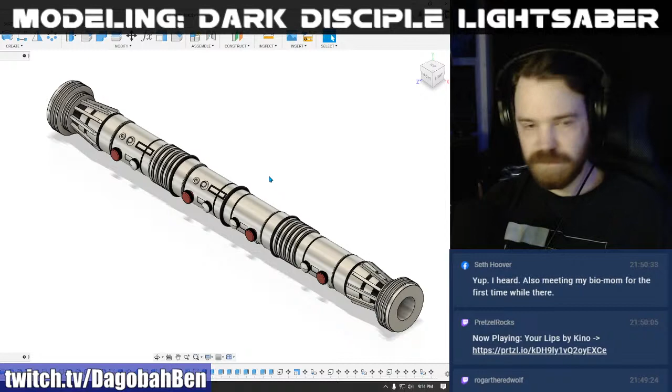All right, so if I get rid of all that stuff and the adapter, because this is the part that we'd be attaching the Dark Disciple's hilt to. And if we want it to look like it's half and half, then...

244. That's kind of short, isn't it? It's a little short. Did it have the pommel section, or did it stop at the black grip where they were joined together? Oh okay, so it stopped at this extra pommel area. Okay, that makes sense. So that's going to be our pommel area. So 244 minus the pommel, without the pommel. With the pommel it'll be longer, which seems about right.

Where is my image? What the heck, man? That didn't show up at all. Is it just too small? What's going on here? What the heck? Okay, that's weird. Canvas is not showing up.

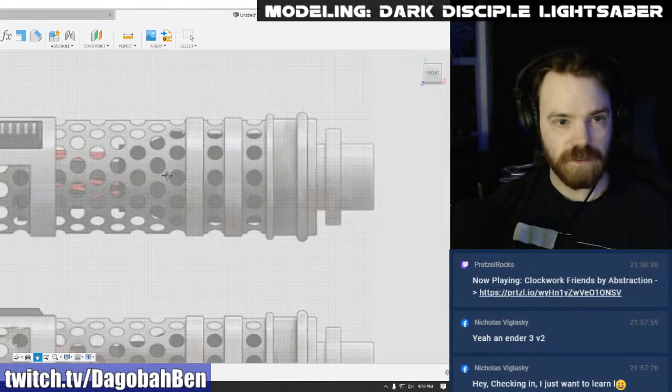Let's go create a sketch, and I need to... actually, you know what, make some reference lines first. That's what we need to do. Okay, so the radius of this inner tube is going to be around 16 to 16 and a half. Let's do 16 and a half just to be safe. Okay, so now I'm going to make a sketch this way, and we're going to do 33.

I'm thinking about this, and I think I need to go larger in diameter, because the rest of the sabers usually average around 40 millimeters on the smallest circumference. So I feel like I need to start at 40 with those, so that all the connectors fit the way that they do on the other sabers.

Wanted to use this to aid with machining. Figured it was time to jump on board. I use Mastercam for CNCs. Fusion 360 does do CNC stuff as well, but the free version is a little bit limited in what it can do for CNC.

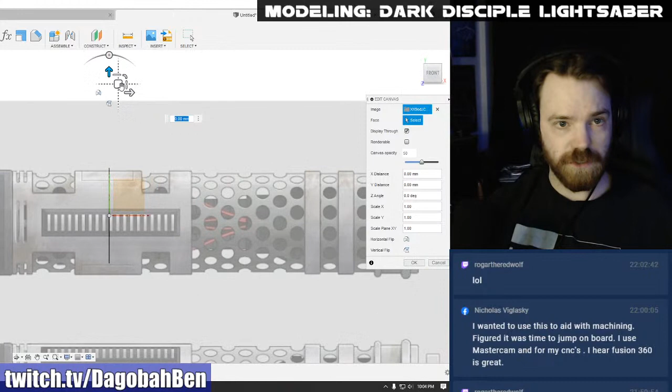So, all right, we need our origin there so I can get this to line up right about the middle. All right, so now I should be able to go 40 with this.

Make a quick line, offset it, make both those lines construction lines, and then use my trim tool to trim right between them and break the circle. Once I have a broken circle, I can go to my sheet metal tools, and I'm going to create a flange out of this, and try to figure out about how long I need it.

Let's see, go 2 sides so we can fill that out. And we need to be on the inside. So it's 40 millimeters around the outside like that. Hit OK.

And then we come in here and we extrude a tiny little section so that I can grab that little flat piece and unroll it.

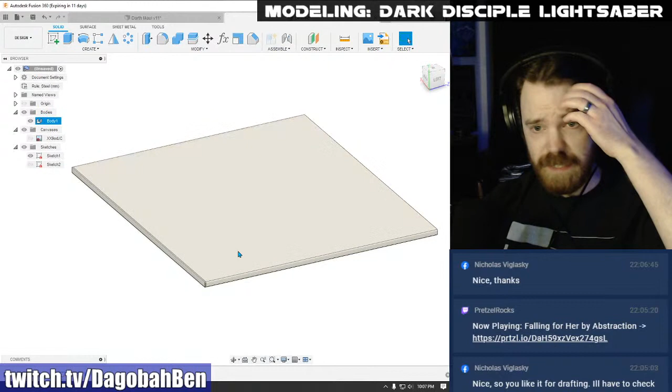So to me, it was a much smaller learning curve than something like Blender, where Blender is more like modeling with clay, and if you want to get into different tools like more parametric modeling, man, I couldn't get the hang of it. I really couldn't. But as soon as I opened Fusion and got used to the sketching tools, oh man, it was super easy. All right, so I want to figure out the dimensions of this guy.

So we're at 130 by about 115.9. Okay, so then we open up Illustrator.

Okay, so it was, oh, I need to redo this document in millimeters. New document, millimeters. There we go. Okay, and it was, what was it? 115.9 by 130.

Okay, artboard size doesn't really matter for this, because all we really need to do is just make a bunch of circles that I can then repeat a whole bunch of times. Oh, wait, what am I thinking? I don't need to do this in Illustrator. I can do a pattern of circles in Fusion. That's so easy. What was I thinking?

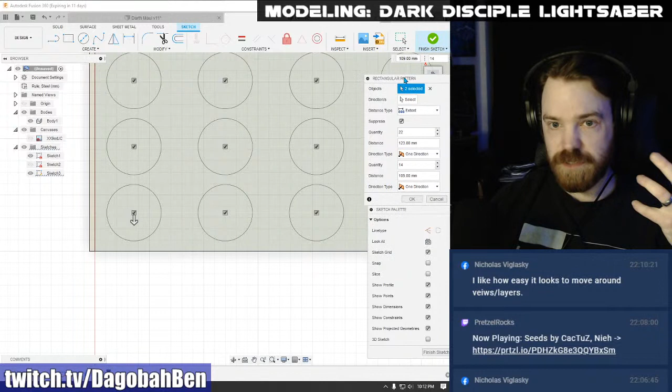Oh yeah, it is, it's very easy to navigate. Being able to change your view, turn things on and off. It makes doing these processes really much faster than some other programs out there for sure.

Okay, so I think, so if I shifted this over to like there, you know, where they meet up in the middle. Let's go 15. All right, cool.

Then if I want to see if this works, I want to see if I can grab just those, move them. Oop, nope, it doesn't want to do that. The reason it doesn't want to do that is because it remembers my pattern. So if I click on my pattern constraint and delete my pattern constraint, that means I can't edit the pattern. But it should let me move things.

That looks pretty right on. Okay, so if I just grab every other row and do that, then we should end up with what we want.

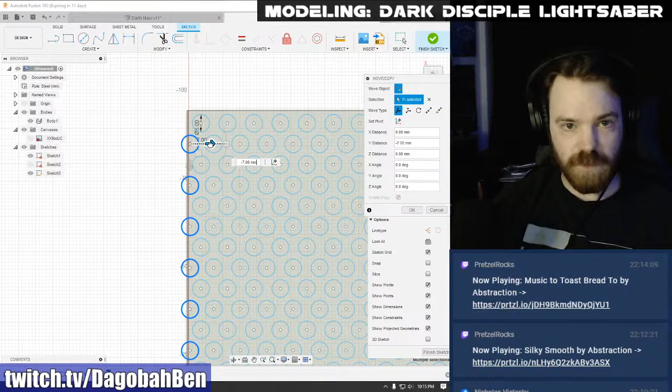That looks about right, doesn't have to be exact. We're just going for, you know, for that piece right there anyway. All right, so that finishes the sketch.

Then I should be able to, if I go in and I select everything, or actually, you know what I should do? Not do that. I should, come on, there we go.

Hit extrude first, and then select almost everything. And then I'm just going to deselect the space between them. That's okay, Edward, you can be confused, and that is valid.

There we go. All right, what is going on? Why aren't you? What do you mean you only have one profile selected? Oh, come on, don't make me pick all these individually. Okay, well, I mean, that got most of them.

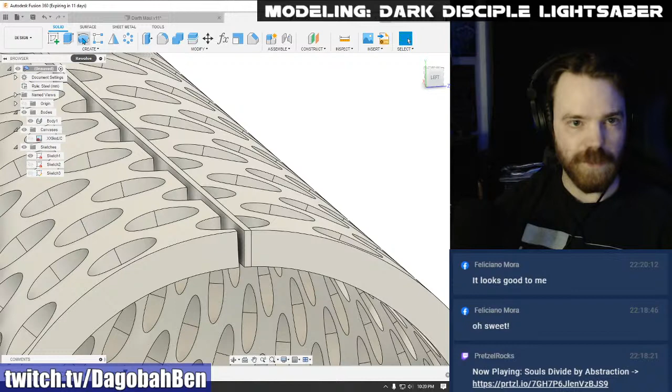All right, so we're going to turn off the canvas, and we need to close this up. So to do that, all I need to do is go back to solid. I'm going to revolve this profile around our central axis, and it's going to automatically pull it 360 degrees and think that I'm trying to cut everything, but I'm going to put 2 degrees.

Because I want it to just overlap this stuff, not very far. One degree doesn't quite do it, so maybe like 1.5. Okay, so now it's cutting into that face, and all I have to do is hit join and hit OK.

And now those two faces are joined together. It's still a sheet metal body, so to break that, usually what I do is I take it into surface mode, and then I delete surfaces and then repair the surfaces, and then stitch it back together as a body.

Now this thickness, 2.5 millimeter thickness, that's a pretty decent thickness for this particular mesh tube thing. We could cut this thinner if we wanted to, but in surface mode I can just delete that face and that face and that one too.

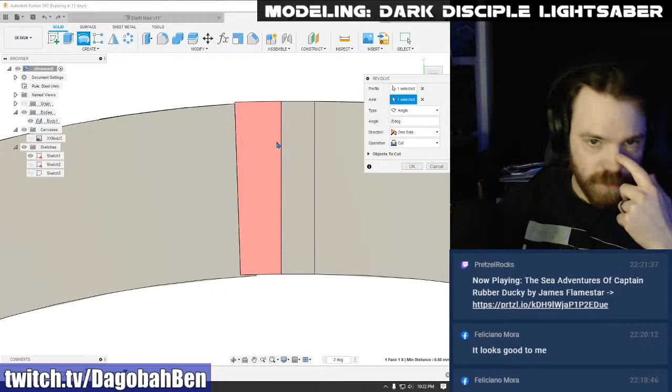How weird, okay. It's revolving. Oh, I know what I'm doing wrong. I'm supposed to revolve these faces.

Because what I - here, I know what, because this is technically a flat face, and so we need to extrude that back into itself to cut it off, and then revolve to get rid of it.

So if I subtract 0.5 millimeter, then it should cut back. There we go. Okay, now I'm doing it right.

They could be on Facebook if they want to, Tim. Rogar, I don't know how you want me to call you.

Okay, now I can take Revolve, and I can grab the faces on one side. Doesn't matter which side.

And then grab my central axis, and take that 3 degrees over. Everything lines up very nicely.

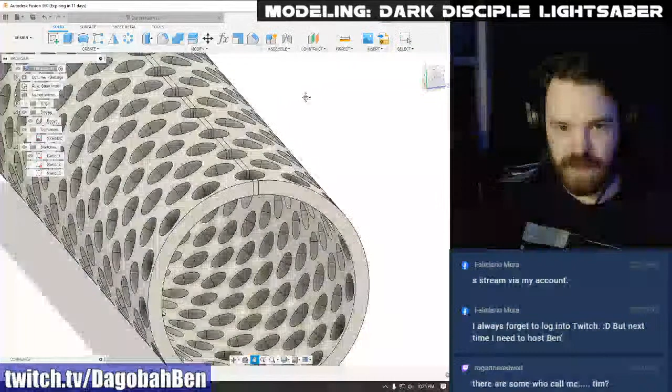Cool. So it does have some extra faces there, but if I didn't have edges on, you wouldn't see those faces because they're all perfectly flat. And if we go to our top view, you can't even really tell that these are weirdly joined circles. It was almost perfect, how the half circles worked out. Wow, lucky me, that just kind of worked out in my favor.

So we don't really need to do anything with this. What I'll probably do is go ahead and delete one edge, and then we'll refill that in with a patch, and that'll make it a solid body instead of a sheet metal body.

I don't know if I really need to do that, but I like working with solid bodies when I get to the part where I'm kind of packaging files and exporting.

Well, yeah, we can't have streaming goals unless I hit affiliate again, and I don't know if we're going to do affiliate. If I'm offered affiliate, might not.

Yeah, it's super user friendly, and you can get a free license for Fusion as a hobbyist, or personal use, as they call it. They have a personal use license, and as long as you're just using it for personal stuff. Technically I think I'm on the education license, because being a teacher at Mizzou has a few perks here and there. But the personal license you can get, and as long as you tell them you're not going to have an income based on using the program, they'll let you use it. The limits on its features are like it won't do multi-axis CAM and stuff like that, but for building STL files for 3D printing, totally usable.

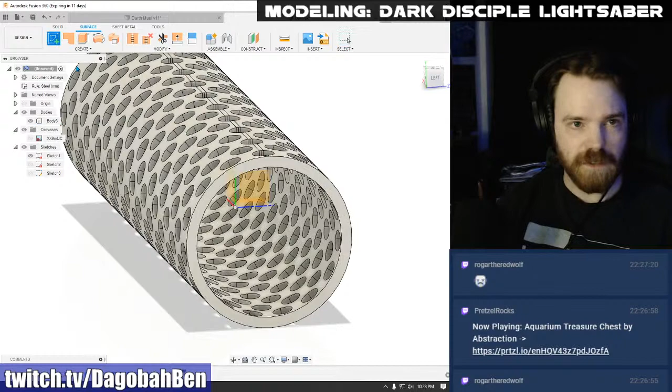And then if I want to make this thinner, all I have to do is come in here and grab an offset. This is, what do we say, 2.5? So we could shave a millimeter out of that. Just hit OK on that offset, finish that, and then extrude this profile right down the middle.

Now there is a way that I could modify the sheet metal rules so that I work with a thinner material. It's under parameters. As you add things to your model, you get parameters, and you can open those up and change the thicknesses through there, and it would essentially do exactly the same thing I did, just without that extra step of the extrusion. The extrusion is the easier thing to do. Messing with parameters is a little bit more advanced, I guess, but it would be good if I got used to using parameters more often, for sure.

All right, so we've got that now. Let's open this back up, let's grab a sketch, and let's plot out some of these other sleeve parts.

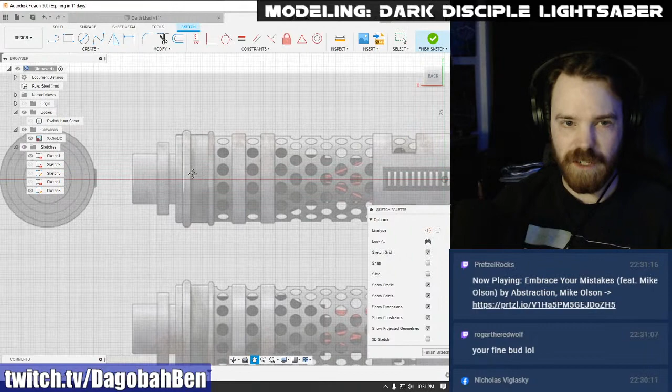Yeah, I know, Rogar. I know those were cool, but if I go affiliate on Twitch, then I can't simultaneously stream to YouTube and Facebook. There are some people on Facebook that still watch here and not on Twitch, and it's convenient to live stream to YouTube at the same time because I don't have to upload it later, it's just archived on YouTube for me. Whereas with Twitch, if I forget to download the video, it's just gone forever.

All right, I'm gonna move the canvas up so that I can see this at 40 millimeters. So what I need to do is I need a reference line that is 20 tall. That gives me a reference of where our lightsaber is going to be.

If it's an accident that's an error that feels good, then you leave it in.

You know what I need to do? I need to open this up. I need to look at, let's finish that sketch. I need to see how big our connectors are again, because I feel like if I can make this smaller, I should make it as small as I can. So this is 16.1, 10-sided.

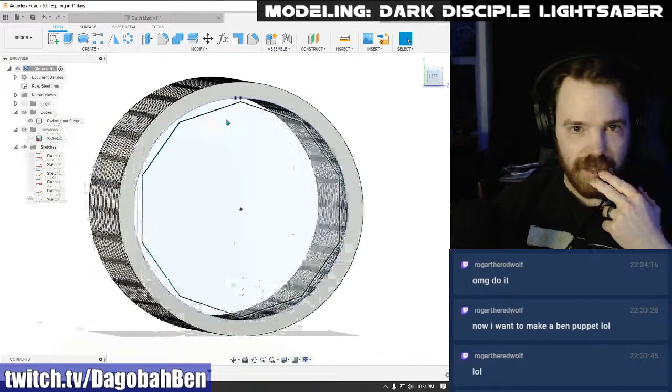Okay, so if I shave off a millimeter around the outside, then that would make this thing 38 instead of 40.

All right, so what I want to do is I want to grab press pull. I want to grab this, I want to see if I can pull it inward a little bit more, if it's going to let me do that. It did. That totally worked, I did not think that was going to work, but it totally did.

All right, so let's not go in a full millimeter, let's see what happens when we go in 0.5. Oh man, that's almost perfect. Oh, that just barely misses. Okay, all right, so I pulled that in as far as it would go.

And now I should be able to, here, let's make another new sketch, and I want to offset this. Actually, before I do that, I want to measure first. What's our thickness currently? 3. I should have known that.

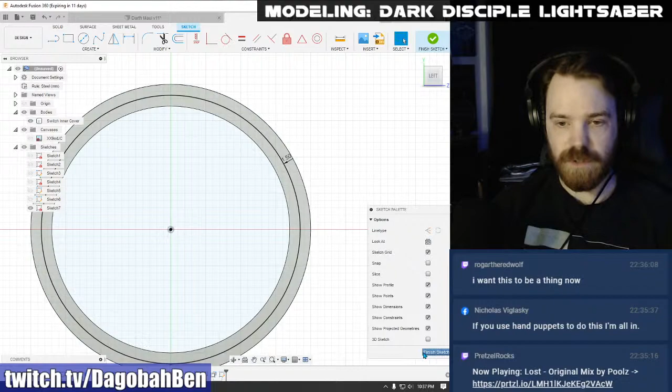All right, so let's do an offset of minus 1, or let's just do 1.5, that's an easier number. All right, so then I want to grab the outside, and we're just going to cut that off. There we go, okay, so I got rid of some of those extra faces too, that's good, so that makes this 37. Okay, so 37 is the smallest that we can go.

So let's open this back up. Not you, there we go, this guy. We'll make an edit sketch. So 37 divided by 2 is 18.5. All right, so that's where I need to move the image to make this work.

There, that lines up pretty well. So this reference line just tells me where this is going to exist. It's not going to line up perfectly because our girth is going to be a little bit more than the design, but I want the length to be the same.

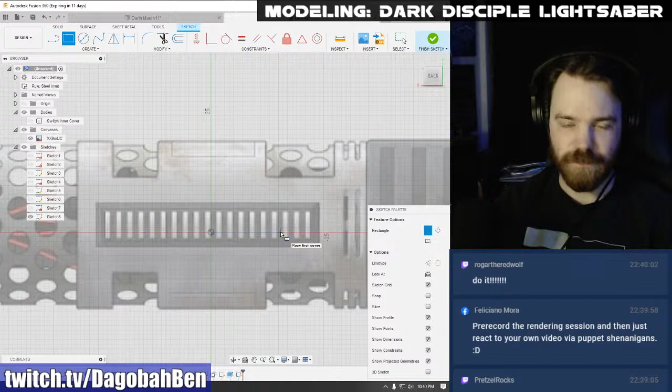And for this, I don't think... do I need another sheet metal? I guess it'd be easier with a sheet metal material, just to cut these out. Unless I wanted to try that emboss tool. Let's try the emboss tool, I want to see if the new emboss tool works better.

All right, so this should be... see, that says 19.7. Let's do 19.75 by 65.

Just pre-record the rendering session, then react to your own video via puppet shenanigans. Oh, but then I'd be working, I guess I'd record me just making the model, and then I'd just be talking to you guys as the puppet or something.

Okay, so I have this. I know what I could do to make these empty sections here. Oh, you know what? Duh, that's so easy. Okay, I know what I need to do.

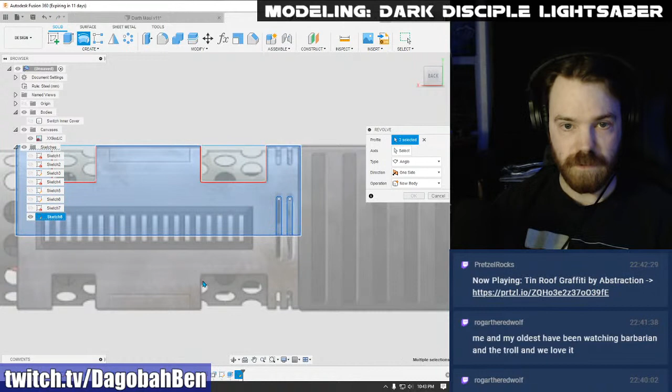All right, so I'm gonna revolve this, I'm going to revolve the whole thing. And I want it to go across there, 90 degrees, symmetrically, like that.

Reactivate this, grab these two profiles, grab them symmetrically, just cut out like that. And then this pattern looks like it repeats in both directions, so I should probably do that after mirroring.

So yeah, we're gonna grab this, we're gonna mirror this, join that together, and then I want to go back into this sketch and mirror this. So I get like that. Then I can grab all of this stuff.

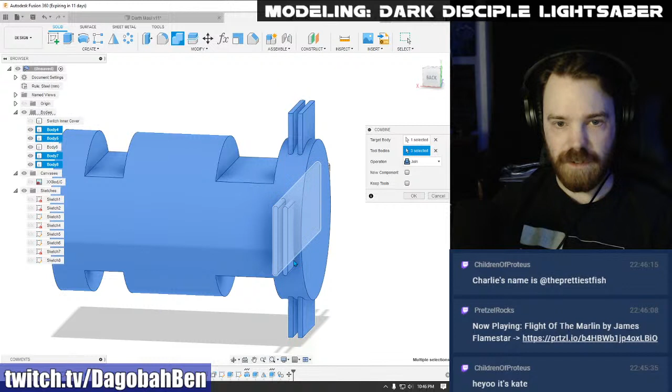Okay, so this is my target, tool bodies. And come on, there we go. And then cut, hit OK. And there's that. All right, so that looks like... okay. All right, yeah, that looks pretty right on.

All right, and we'll still get a chance to use the emboss tool because we've got this kind of rectangle groove etched out of it. It looks like it reaches around the opposite side. Where does it go? Oh okay, so it almost reaches up to the button on both sides. Okay, that makes sense. That'll be an interesting use of the emboss tool. I wonder if that's going to work or not.

All right, so then if I turn both these bodies on, we can see about where we need the thickness difference to happen.

So if I turn that off, and we're going to come in here, and I want to offset this. Let's see, we went from 18.5 to 19.75, so that'd be minus 1.25, I think. Yep, and it fits. All right.

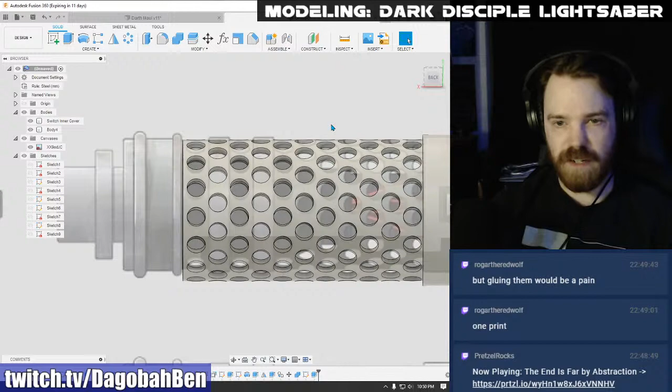Yeah, I think we'll just leave that as is. All right, yeah, we'll eventually join those together.

But for now, we need to go back into here because we've got two more rectangles that I missed, which need to go, basically going to cover up this and the one next to it.

6 by 19.75, and we're going to move this over. Oops, need to move it over just a little bit, just a tiny bit. Not that much. Is that pretty well centered? That looks centered, okay, cool.

Hit okay on that, copy till it hits that one, just like that. I know it's not lining up with the design, but I want it to line up with the holes. So, all right, cool. Just turn that back on.

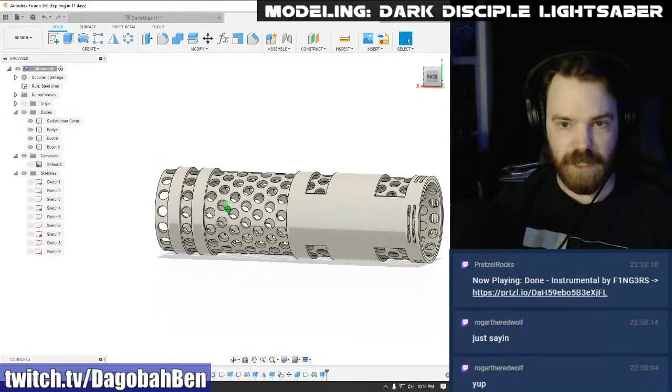All right, so there's that. That looks pretty right on. We need a rectangular groove that follows around there, and we need this big button thing. I think we can do that pretty easily.

Before I jump into that, I want to see if this will combine properly. So let's grab all of this - it's remembering I wanted to cut last time, but let's hit join on that, should join. Yep, it joined just fine, all the bodies joined.

Why has it got an extra face there? Is there space between these two? There might be space between those two.

Alright, so maybe what I need to do is, let's go back to this sketch, and we're going to cut it where it's going to overlap better. Since we're going to join it, we want it to overlap, so that way when I do the join, then the overlap does its thing.

Yeah, okay, so now that's just two faces. I think that's because they don't match up on length. So if I just grab this and go to object, then those two will flatten out that way. Yeah, there we go, that works out.

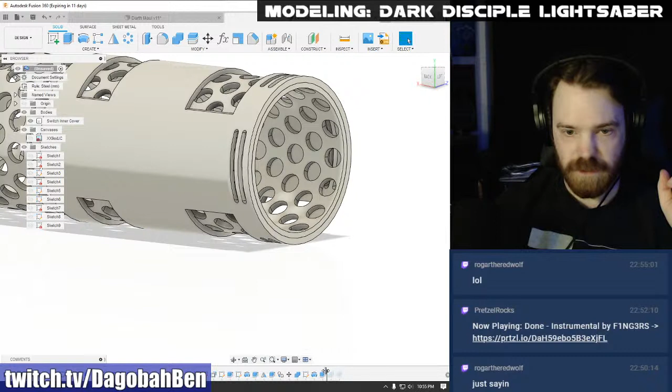I could. What could I do? I could join this. Okay, I have an idea. Let's undo that. We're just gonna step back in the timeline a bit because I want to. Let's see. Is that what I'm looking for?

Okay, yeah, so that's that cutout there. So right now that is a solid object, and if I combine these two together while it's solid and hit OK, right? Okay, and then

I grab this and do the cut all the way through, which is too big. I need what size do I need again? I need this one. Where's that one at? Okay, so that's 34. Okay, so

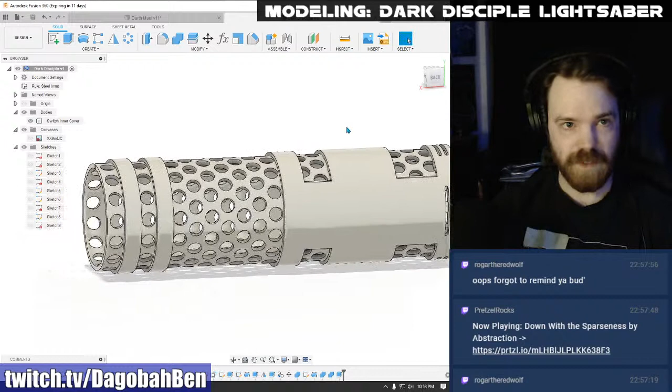All right, so Fusion has this new thing where it can do a thing called emboss, which has not been available before. I'm not sure exactly how it's going to go, because usually I do what's called a projection to a surface, and the surface projection doesn't work if you go past the two-dimensional plane of the cylinder. So if I wanted to project something onto this surface, I couldn't go past that border there. So I'm curious if it'll let me emboss across this cylinder farther than I should be able to.

And what I want to do is make a center rectangle. Make it longer than I need, and about where I think it's supposed to sit. And then we need an offset on this. Okay, is that centered between these two? It looks close, but maybe it's a little bit off.

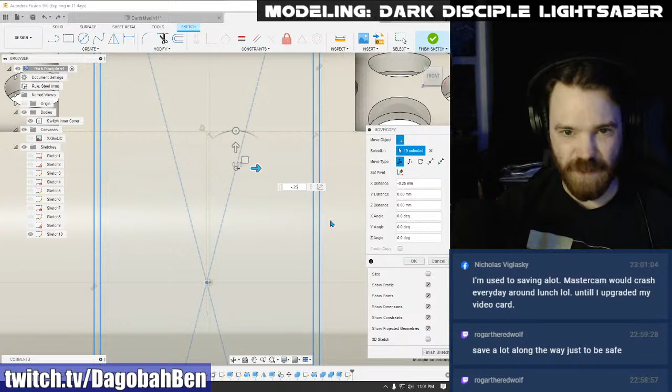Okay, so I want to move this. I want to move it. Oh, it was like a quarter of a millimeter off. Wow. All right. Talk about perfectionism.

Oh man, yeah, that's so. Yeah, I recently went through an upgrade on my motherboard, processor, and video card, because there was a lightsaber I was trying to design, and I was trying to give it a texture, like a bumpy texture, and it had so many tiny shapes it was trying to make. Fusion just kept crashing and kept crashing, and it was using 100% of my old processor. It was limping. So I finally fixed that.

All right, so sketch profile. I want this. I want it on this face. Huh. Look at that. All right, so if I say minus 0.5, holy cow. Emboss is my new favorite tool, guys.

I wonder if we had drawn out all those circles, I wonder if it would have let us emboss all the way through and made this perforation on a cylinder instead of doing the sheet metal thing, because the sheet metal thing was always a workaround since they didn't have this emboss tool before. This is crazy. The only thing I have to figure out is the length of the rectangle, because it needs to be up to here-ish. When we're looking at this view, it gets to like there. So we're short maybe, let's give it another 10 millimeters and see where we get to.

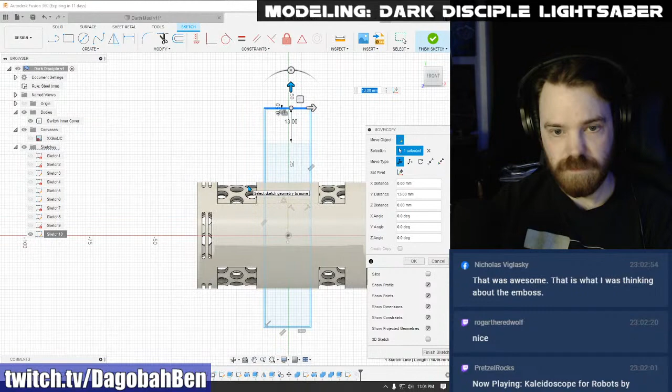If I grab this and just pull it up. Okay, move this. Move that one up. Let's say we'll go 6 and 6 first. So we'll move that up 6, and then if I come down here and move this down 6. Oh no, it didn't actually change it. All right, maybe if I delete some more constraints. Okay, now it's working. All right, so I can pull 6 this way, and as long as I keep my offset, then that won't get affected. Pull 6 this way, hit OK, finish sketch.

Should change the emboss. Okay, I feel like I'm a lot closer. I still need like 3 or 4 more millimeters. Okay, so my first guess was more correct.

Yeah, this is a brand new tool. It's not like when I would have to emboss text into a round or curved face — I had to do this sheet metal thing, a workaround and stuff. It's a pain. But once I learned the skill, it was like, okay, that works. But man, having this sketch profile wrap around the cylinder, that's amazing. This is the best tool.

Okay, I feel like I'm right on the money now. The bottom side looks... oh, well, duh, the bottom side is not right because the canvas is not stretched to meet mine there. Maybe I can stretch it, though.

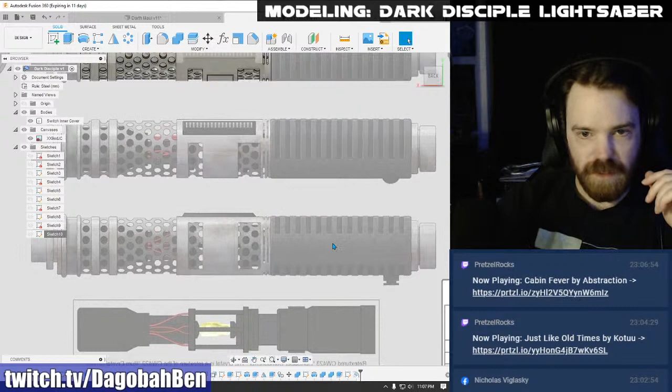These look like they're supposed to be deeper, but is it just that it's one set of short vents and then these are supposed to be longer? Is that what's happening? I feel like that's what's happening. Because I know this is like a 45-degree view, and then that's straight on the opposite side, or this is 90 degrees. This is 45, that's 90. And that does look longer than these do for that side. So it seems that these need to be wider than those. That should be fixable.

I just have to get back to this stage, I think. Yep. And then I need to do a scale on these, non-uniform, and I need my point to be the origin, and then I need them to pull this way.

That seems better. Okay, and just fast forward to the end. There we go. It'll have a bit of a weird angle right there, because I'm not projecting through there — you can see that face is going straight down instead of kind of at an angle.

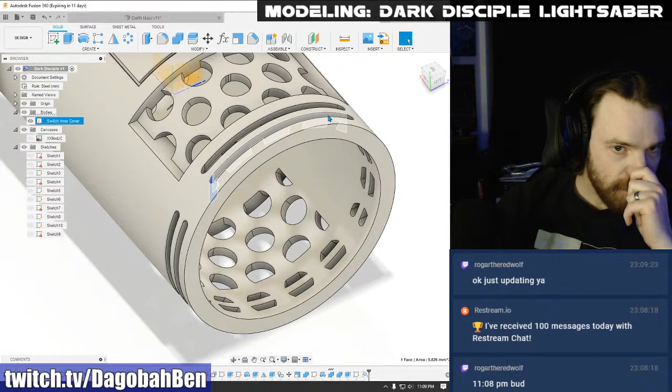Yeah, I'm not, man, I don't know that I'm happy with that. I feel like I need to project that shape as opposed to cutting straight through. For this one it worked out okay because they're so much smaller, you wouldn't really be able to tell the difference. But I feel like I need to do something with it. So we're gonna go back one more time.

I think, okay. Let's do this. Let's go back before I copied it, before I did that. I'm gonna grab... let's see what projection does for these.

So we're going to start from object, and then we're going to pull in. Okay, so it still pulls it straight, it doesn't taper it. What was I thinking of that would do that? I guess the sheet metal thing would do that.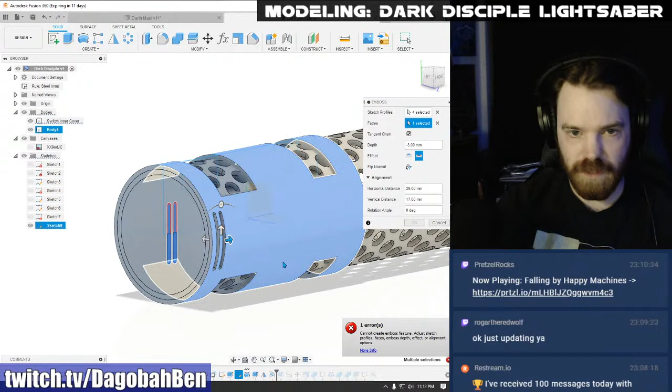Okay, so if I want that to appear on the other side, I guess I could split this and then mirror it. But it feels like I should be able to emboss from the other side of the face, right?

Yeah, I can mirror it. I'm trying to figure out how to, like... I don't like winding up with extra bodies in random places.

But what I could do is cut away half of this, and that way when I mirror it, there's not an extra body. Usually what you do is split the body, split this down the middle, and just turn off the half you're not using, but that leaves an extra body just in your hierarchy.

But if I just bisect this like that, then I should be able to grab this half profile, cut that out, mirror this across itself, and then it's like that. So that keeps the same number of bodies.

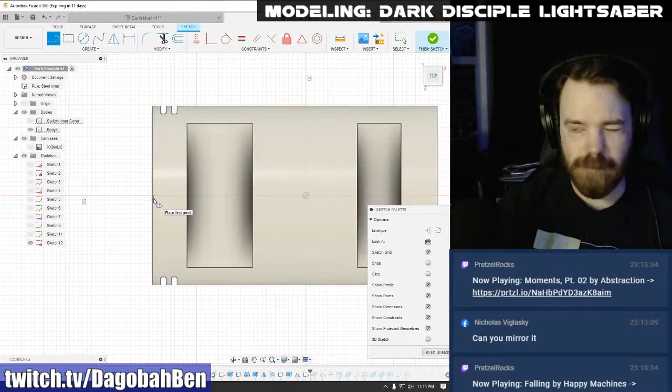All right, so I can grab... oh, but I can't grab the edge of this because it's not on that plane. I wonder... come on, doesn't go away. I don't want a sketch anymore. Oops. No, I do want to do that. Okay.

We'll try a tangent plane on top of this, sketch on the tangent plane, and that way it gives me an origin right there. I still can't grab the edges of this thing, but I at least have an origin point that's much closer. So I'll just zoom in really close and make myself a little reference line.

And then we'll offset that 1.836. Make that a construction line. There we go, now I have a point of reference. That's all I wanted, that's all I wanted.

All right, because we go 1.25 wide. And for this one, let's try 14. Two-point circle, bam, bam.

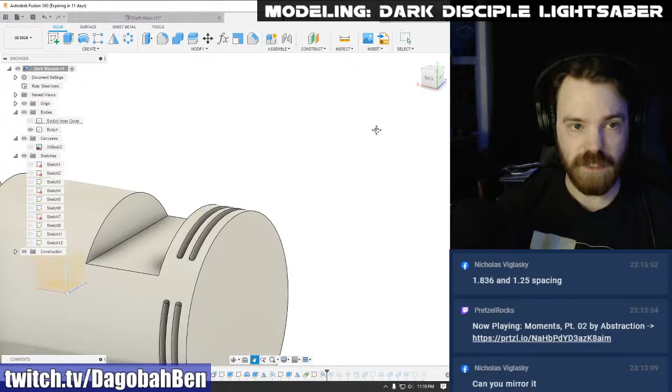We take that down, I think I took it down 3 on the other ones. Yeah, so now it angles inward, that's what I want to see. So let me see if these are too long or not. No, that seems about right, doesn't it? Yeah, yeah, all right, cool.

So now I could do the same thing again, where we edit this sketch, go from here to here. Oops, that is not what I wanted. Go from there to there. Get rid of the bottom, shoop, and mirror again.

There we go. All right, so in my timeline, I'm going to delete the extrusion, the copy, the scale, the combine, and then the rest of it should be fine, I think. Haha! Huzzah, it worked.

So now when I zoom in here, if I grab that face, now that face is at a nice angle from where the opening is. That'll look really nice.

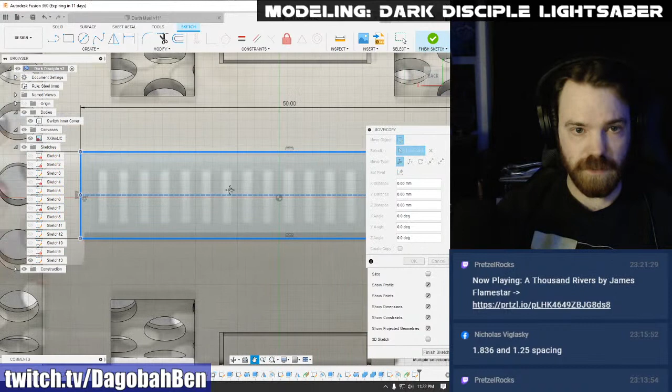That's all right, we can just use a 2-point rectangle, and then just make sure that we're centered. All right, so 50 by 10 sounds like a plan to me. We'll see where our middle is, and then we'll just move it. This doesn't have to be super exact on where it sits, because it's just going to attach kind of on top. So I just get it kind of close. All right, so finish that.

As far as the height of it, doesn't look super tall. Looks like it might be around 3 millimeters ish. Let's go back into our sketch space so I can just get a quick measurement. I was right, so 2.75 to 3 millimeters, about 1/8 of an inch, so that seems like a good approximation. We'll probably have to make it kind of 3 millimeters thick anyway for it to join into the cylinder.

All right, so I'm gonna pop it out this way, and we'll do 2 sides. Yeah, so when it's 3, it pretty much joins in there. So new body, this direction, we want taper angle. Let's see what... oh, wrong way, okay so go -20. Then that's kind of what we get, not quite there, so -30. -30 looks pretty right on. Yeah, minus 30 looks pretty right on.

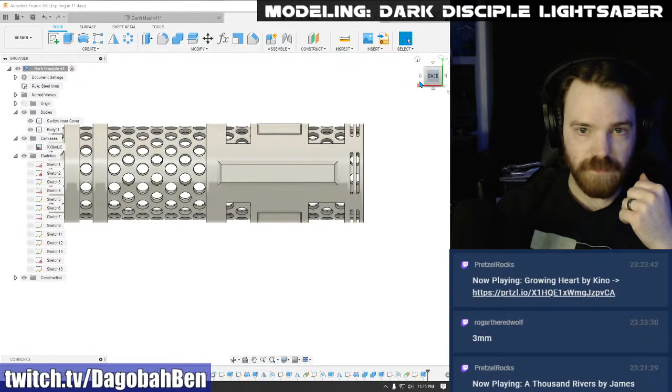Because in our concept art here, it doesn't really show us how that joins in. Like there's no flat parts there, so it must just join straight in without any extra bits. So that should be fine. So that's what that'll look like once it gets joined on there, and I guess we'll go ahead and do that, just combine those two together from here to here. Let's call that switch, there we go.

All right, so now I can make a sketch on top of this, and then we just need to make a center rectangle. Looks like it's going to be 1 millimeter wide by 6 millimeters tall. That seems like a good... or should we go 1.25? Because we did 1.25 on some of the other stuff too. Or is that going to be too much? That's fine.

All right, cool, create rectangular pattern out of all of these. Oh wow, that just kind of lined up perfectly. All right, cool, so now we have to find the number that fits how many are in there. Is it 17? Nope, okay. 18. 19. 19's right on, cool.

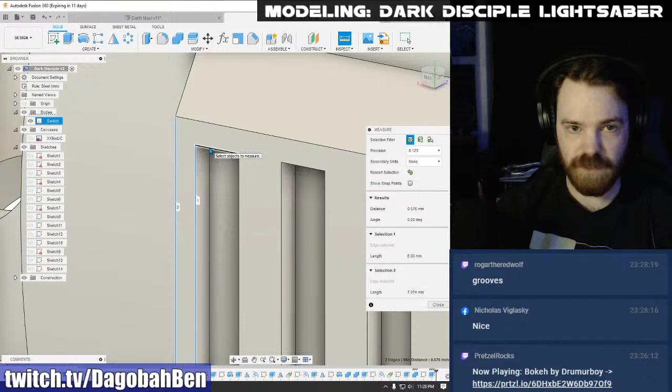All right, one thing I am curious about is some of these dimensions near the top, to make sure that it's enough for a printer head to look through. 0.5 millimeters is plenty. Okay, so it looks like it's 0.5 from all edges, and a printer head is 0.4. So depending on how you oriented your print, if you oriented it vertically, then I guess it wouldn't really matter that much on the space between them that way. So I guess that would be the expectation of doing that.

So okay, now that that part is done, I need to soften out some of these edges here. So we're going to grab our fillet tool, and we're just going to take away some of this sharpness. Put a 0.5 millimeter fillet on all those just to round them off a little bit, make things a little bit softer. I probably won't do it for the cutouts, I don't think. I mean, it kind of looks like maybe they should.

Should I go ahead and round over everything, or just those ledges? Just the main parts, or should I fillet all of it? Mr. Piedady says nah, no fillet. I mean, at this size it's probably unnecessary, but I do like fillets on the edges of bands and the ends of pieces, just to give that tiny bit of space. But filleting all those pieces, yeah, probably not necessary. I was kind of leaning away from it anyway.

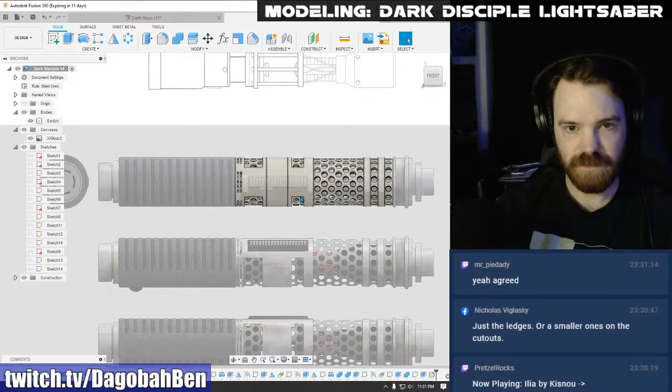All right, so I'm going to go ahead and move on to the emitter. I can always go back and do fillets later. I try to always do my fillets last in case I ever want to.

You can see basically from here to here, this part is unnecessary. And I guess mostly where the crystal is, you can't necessarily see where the crystal is, but if we do model it...

I can make the crystal a light source in the render, and it could look really cool, like glowing out of that. So we might do that.

Wires, probably not going to do those. I mean, we could toy around with modeling wires if we wanted to, but probably not necessary for the printing part, unless I want the wires to lay against here, against that surface as an additional little texture, but probably not necessary.

Okay, let's grab our origin, come out here. We're coming out to 20.5, 2.5, 20.5.

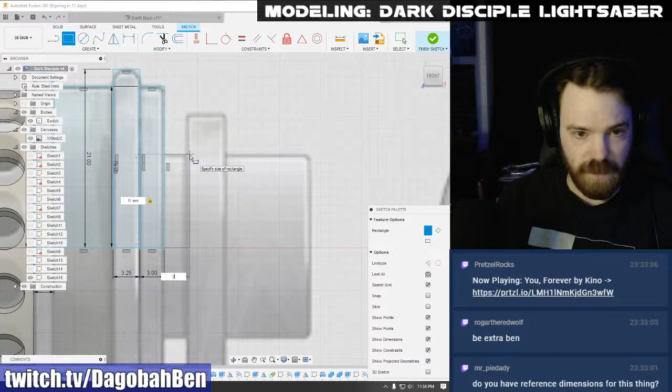I might have to fudge this end a little bit, because I'm trying to remember — I know you can get 7/8 blades, but I don't think you can get 3/4 inch diameter blades. I mean, if you're building it custom, you could get your own anyway. But...

So if I want to go 7/8, that's a 22 millimeter opening with tolerance, which means I've got to have at least 23 millimeters worth of space. I'm only 1 millimeter off from that, so I could go 11.5 and just fudge it a little bit.

I could scale up the whole thing a little bit later. I try not to do scaling at the very last of it, just because that can sometimes mess up some of the thicknesses of materials too and stuff. So...

I try to keep the length of the lightsaber as reasonable as possible, and then when I'm making things have more girth but no length, it can get really wonky. So if I can just toy with numbers a tiny bit at a time, sometimes I can make it work out without getting too distorted.

I'll go 16 on that. Well, the inner diameter that I would need for a 7/8 blade comes out to like 22.75. And this would give me 23. So that's, oh yeah, that's like a super thin wall.

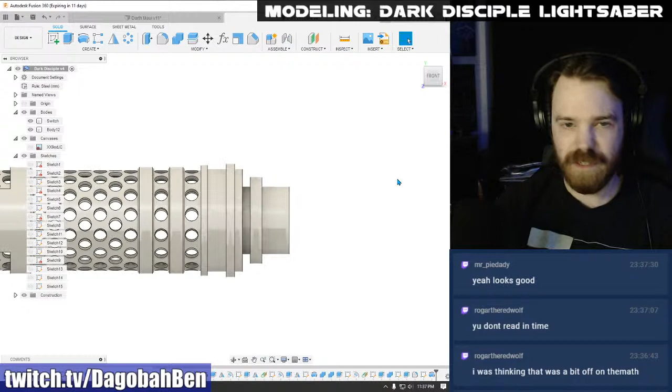1.25 on that one. Oh yeah, I guess I could have just grabbed the face.

.5. I think it needs to be 1.75. Nope. 0.65. 1.55. Close enough. There we go.

All right, and then we'll fillet these. This one I think is going to get a bigger fillet, so we're going to go 0.5 on those. But then for the one on the end, I was thinking just a little bit more. Usually the very end of the lightsaber has that a little bit more of a rounded look, so that's our emitter.

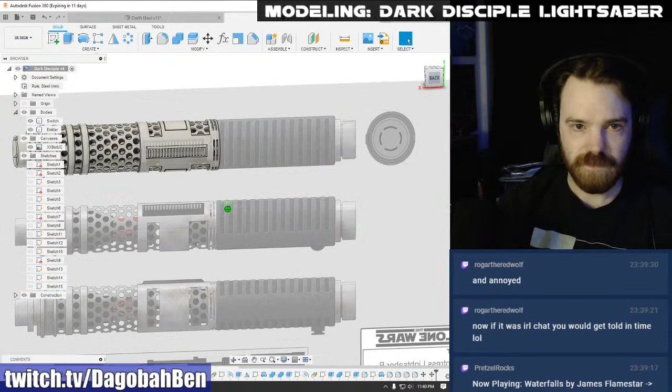If this is our, did I put the- dang it, I've been building it backwards. Easily fixed though. All I got to do is rotate this back where we need it. There we go. Good thing this thing doesn't have a lot of asymmetrical details, because I just realized we'd been building on the reverse side of the image for all that stuff.

Okay, so at 90 degrees from the button, these come down. Okay, so this appearance happens on the bottom as well. So we might as well create half a cylinder and emboss one and then mirror.

Nope, nobody caught that, not one. That's all right. Okay, since I want to make a half cylinder, I don't want to create a cylinder and then cut away half of it. I can just create a sketch and then just rotate it half.

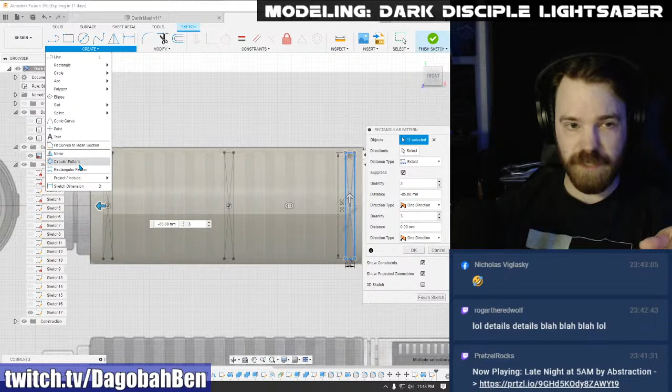All right, cool, grab this rectangular pattern. Rectangular pattern and circular pattern are probably two of the most commonly used things, or two of the most common things that I use in the sketch tools: circular pattern, rectangular pattern, and mirror. Because in lightsabers and props and stuff, there's so many repeating patterns, and this is the easiest way to make them for sure. It's so convenient.

1, 2, 3, 4, 5, 6, 7, 8, 9, 10, 11, 12, 13 of them. All right, so I just go- oops, 13. Hit OK, finish sketch. All right, we'll create an emboss of these on that face. Nice.

All right, let's see, the difference in height doesn't look like much. So 0.5 millimeter difference is probably plenty, I think. Let me switch to a bottom view here. That looks about right.

Though might need to go longer on those rectangles and reach down a little bit more, maybe. Let's mirror it and see what it looks like.

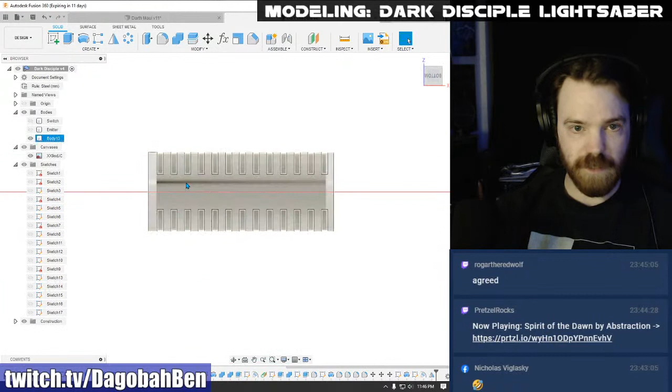So now when I turn this way, oops, not that way. Now when I click to the bottom there, that's how close those are, and that looks about the same as that, in my opinion. I think we got it. I think we ended up where we needed to be on that.

All right, let's pop this guy out, and then move him point to point. Oop, that's not what I wanted. From there to there. There we go.

All right, now the edges of the black grip area are definitely filleted. Let's see. It seems more round than the other parts. So I'm actually thinking a 1 millimeter radius on that, and that looks fairly close. Yeah, close enough for me anyway.

Okay, I'm not going to add the Covertec clip. Covertec clip parts are super easy to find, and then you just have to drill and screw it in and stuff, so I'm not going to bother with modeling out a Covertec clip. I should probably model my own version, or download a version and import it into my files so I can derive it into various designs where needed.

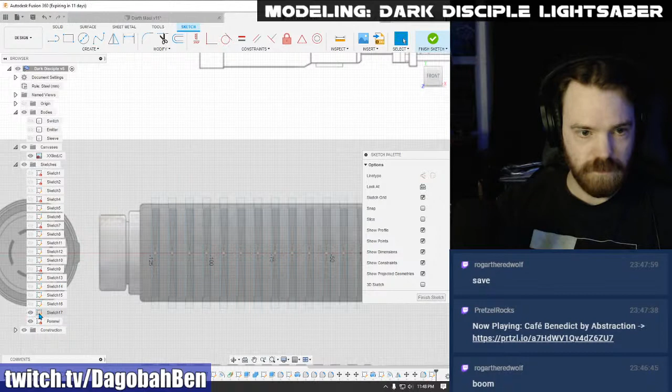Okay, need to grab the origin so that we're stuck to it. There we go. Pommel size doesn't matter too much, so I could probably just get close to what these are. 4.5 by 17 sounds good to me. And 12.5 by 1.25. It's a pretty common — 1.25 millimeters seems to be a recurring thickness or width in this particular design. Kind of interesting.

There we go. Finish that. Revolve these three guys. All right, it even gives us our vent design. That's pretty convenient. Let's just go ahead and put that in here.

Let's see, 16.75 offset, 1.5, and then we need 45. And then we'll offset this 1.75 that way, and minus 1.75 the other way.

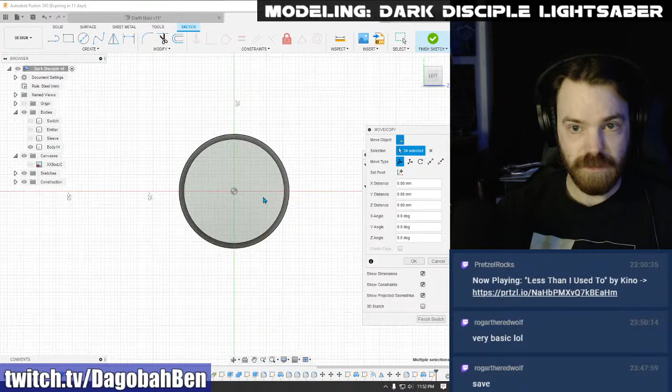It's way over there. All right, because of where the origin is. Okay. Boom, right there, right on the money. Okay, finish that sketch, extrude those 4 parts.

Just like that. And then this needs filleting for sure. The other side of it also looked like it needed some filleting as well. Let's grab another edge.

Do 1.0 on that too. And for this one, does 0.5 look right? Or does it need to be a 1 also? That could be a 1.

There we go. All right, so then we'll just pop that out and then move it back point to point so I can grab not that point, this to that. There we go. Now they butt up mathematically perfect. Hey, there we go.

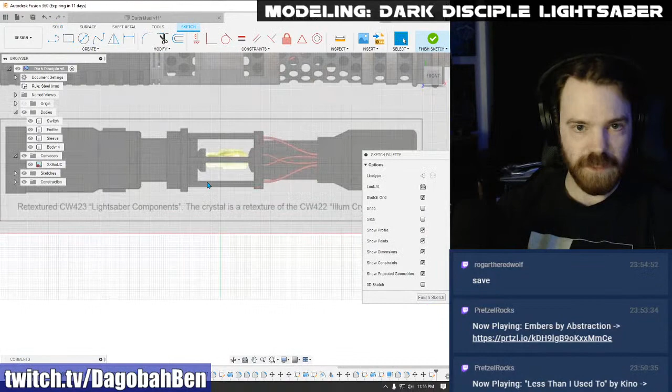Yeah, I guess I'm just gonna go ahead and design it down there where this is. This looks like it's pretty easy to put together. We just need it from here. So, just gonna — or actually, you know what? No, it's gonna be better if I just move the canvas. Let's edit canvas. Let's see what's better, the drawn diagram or the picture? Probably the drawn diagram.

There we go. Okay, so we need to be... let's see, so we'll start there. Just plot this out really quickly.

What are those pieces? Don't know, that's just the line art with some black infill. This is just the line art, so I guess that's interpretable. Could be, it doesn't have a height difference on either side. I'm not sure what that is. Let's just move on from it.

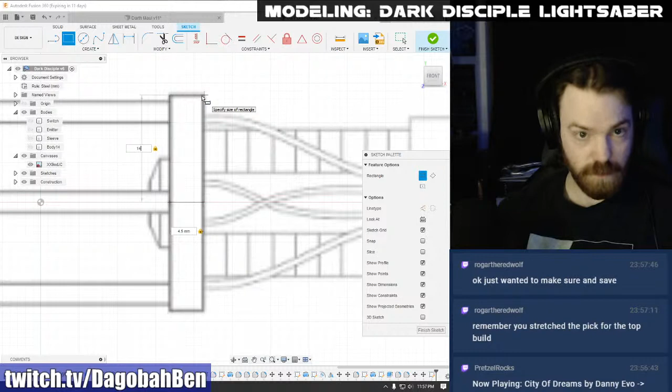Yep, we will save it as soon as we're done with this sketch, I think. 4, no, 4.5, yes. 13.5, no, 14, better.

All right, and then I'm gonna say that these black lines are like grooves, and then this part kind of sticks out a little bit.

So one thing I could do would be to make one cylinder, split it, and then fillet the edges to make little cracks and grooves. Or I could... let's see, I think doing an emboss would probably take a little too much.

There we go, okay. Just had to make sure that wasn't super important.

Yeah, no problem, man. I'm on Mondays, usually around 9 p.m. is when I'm on, so. Feel free to join anytime.

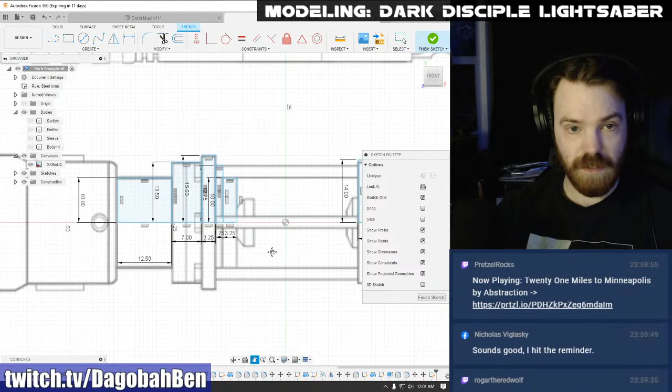And then I guess the inside. See how that goes. Okay, I think that's all the parts that I can make from this particular angle.

Okay, so let's revolve this, this, and that. Okay.

All right, then I want to revolve every other one of these. New bodies, or I guess if I hit new body, then it'll just be... okay, no, I know what I need to do. Yeah, I gotta select every other one, or it's gonna treat it as one body.

Because then I can revolve these. New body. There we go. Now I got a whole bunch of bodies there.

There we go. All right, then I can grab the fillet tool, grab these faces. Or I guess I could, if I'm gonna grab faces, I might as well just turn everything on, because then I can just grab all these.

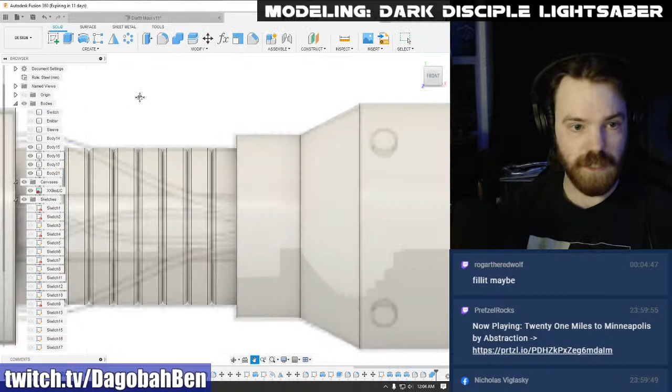Then if I revolve this angle... okay. And if I go one side, I just need to approximate the width of it, and it looks like it's like a third, right? So 60 degrees sounds like that should be correct.

And then if I make that a new body, and then I grab this and rotate on this origin axis, then I should be able to pull that down another 60 degrees. Okay, so it ended up a little bit wider.

So I could go into edit feature and we could go like 45 degrees, and then the rotate would need to be 65. Okay, that's a lot closer. I think that's close enough, honestly.

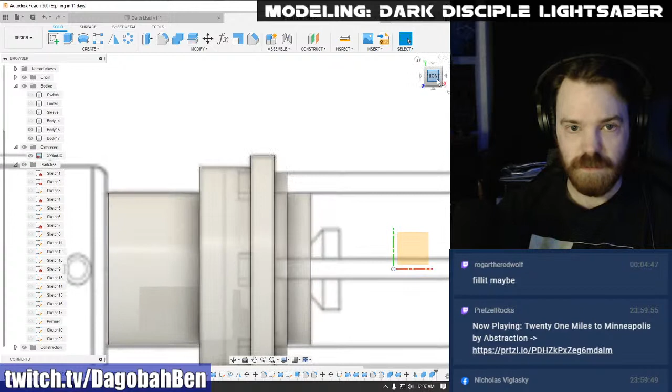Which doesn't make a whole lot of sense when we think about how you'd need to put those in there. Like this should be way smaller, shouldn't it? Or maybe that's what this line is here. Maybe that's like some kind of cutout where it's gonna have room for that stuff. I don't know, we could play with it a little bit, I think.

Very, very funny, Tim. Very, very funny.

You have reached the voicemail box of Kino.

All right, I want to undo that, or well, turn it off, because I want to come in here and I want to make a sketch on this right here. I want to figure out the size of the rod.

Just wait for the tone.

Let's see, 3 millimeters would be an 1/8 inch rod. That seems appropriate. And then I just want the edge of it to just touch that. I think that's what I want.

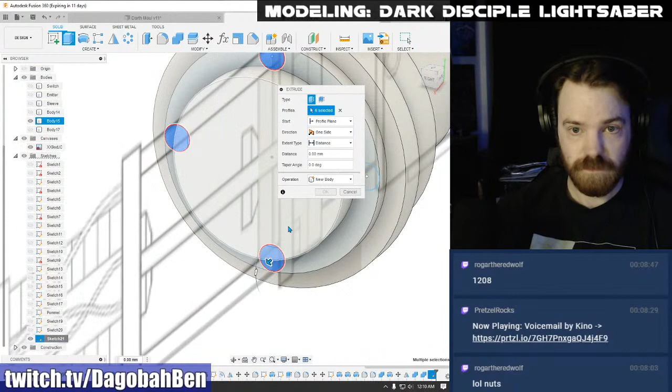There we go. Join there to there. All right, so that takes care of that part. So then...

Where these come out the other side, this is where I'm getting a little confused, because like there's nowhere to put a nut here. Like it would be all the way out here because of where the rod is.

But you can see that the rod lines up right there, and it lines up to that detail. This rod lines up to that detail. This rod lines up to that detail. So it's like...

I don't understand. Because, wait, what if it's not 4? What if it's 6 of these? So it's like, this isn't the top. It's more on this, because the top is, okay. Let's try that.

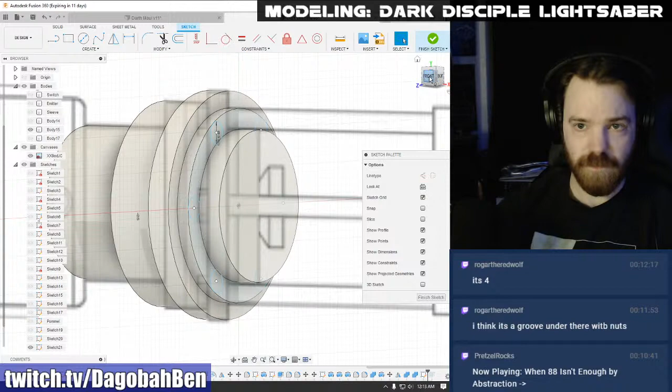And pivot right there. Because if it's like that, then we're on to something. Then it needs to be moved out more. Because then this needs to be up to here where this is.

So if I grab... or is it not gonna... Where's the... How come it's not constrained anymore? Oh, what the heck, man? Is it because I moved it? What happened?

Okay, you know what? We're gonna start over. Screw it, we're gonna start over. Gonna go 3 millimeters right there. Except not right there, we want it like...

Like maybe out to there or something, because then I want a circular pattern of this around this, 6 times. And the top edge of this needs to meet where? There, okay.

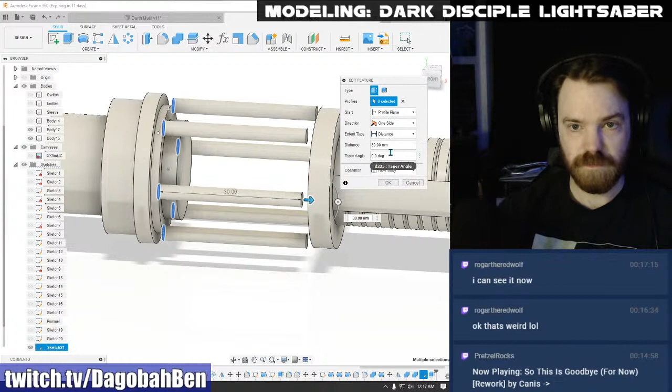Okay, we're gonna cut that short. We're gonna do new bodies. Do 2 sides, pull these this way. And now where those pop out, I could do like some kind of cutout there that's gonna give it room for the nut to exist.

So I'm going to pull this open. We'll go just far enough so I know where to put those. We'll hit OK on that.

What is body 14? Where did that come from? Oh, is that the pommel? Dang it, I just forgot to name it. I was like, what is this thing just hanging out of here out of nowhere? That's not one of the parts. Totally was.

Okay, this needs to be bigger to accommodate these. This is 30, this is 28. So we need to press pull this 1 millimeter, and now that's also 30.

Now we can grab all these. Join that to that. There we go. See, that's looking more like what I thought it was going to be.

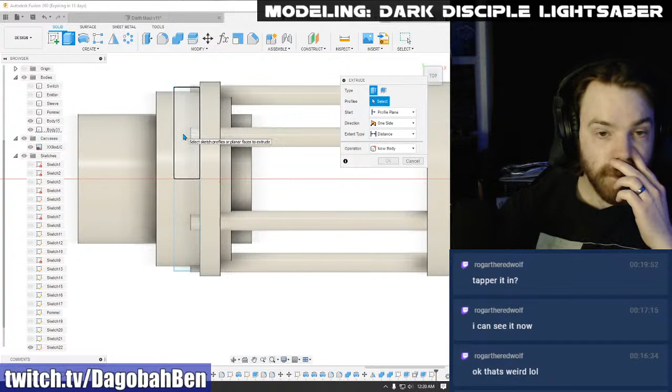And then, oh, that's not what I'm, okay, hang on. I need to think this through completely, because I need it to start a little bit away from this.

Okay, all right, I think if I grab it like this, turn that off, pull this up symmetrically, cut. Then when I look at it from the side, still have same height on top and bottom. But when I turn this back on, now there's space for nuts.

Okay, I guess my rectangle missed a little bit there. Yeah, okay. All right, so let's make an adjustment here. Widen that out that way. Turn this back on. Probably pull this in a little bit. Okay, that's about the same now.

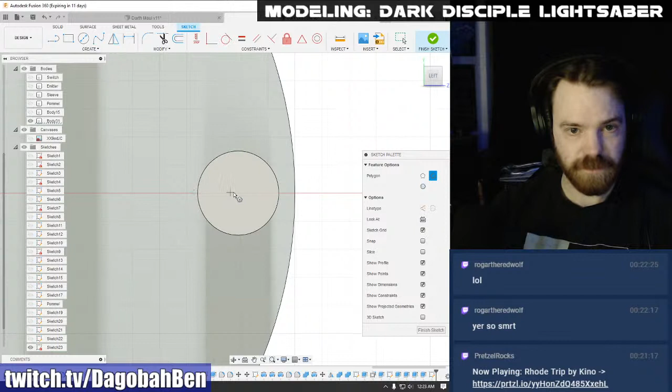Cool, okay, I feel like that works. All right, so I'm going to create a sketch on this plane and then just turn the body off so that we can make a circumscribed polygon right on this origin here, and about in the middle.

And we'll just go a little bit bigger. I don't want to go too big, and I feel like I want to stay inside the borders here. Let's see, we could go 1.75. Yeah, definitely hexagonal, for sure hexagonal.

Circular pattern, grab that guy, grab that as our center point, do 6 of them, hit OK. Now what should our... should it be another hexagon on the inside that it... why am I making a circular pattern with the sketch? I'm going to be making a body and then making a circular pattern of the body. That was unnecessary of me.

Anyway, we could make an offset with a smaller hexagon. So that it's... yeah, I like that. I think that'll be cool.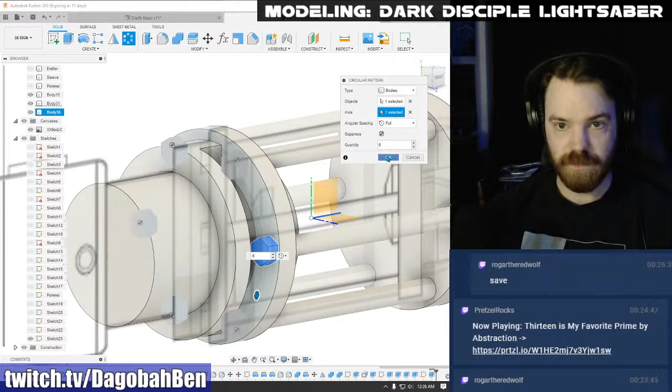So now I can create circular pattern with the body. That's what we want to do. Let's create circular pattern with the body. Around this axis, 6 of them, hit OK. There we go. Turn that off, turn that off, and combine all this crap together. There we go. We are getting somewhere.

Now we just need the parts that hold the crystal and a crystal. There was a little detail. Yeah, some little screws sticking out there. That'll be pretty easy. Just need to make one and then make a circular pattern of it. So that should be doable.

Go ahead and fillet that. Fillet these 2 guys. And this one too. There we go. Okay.

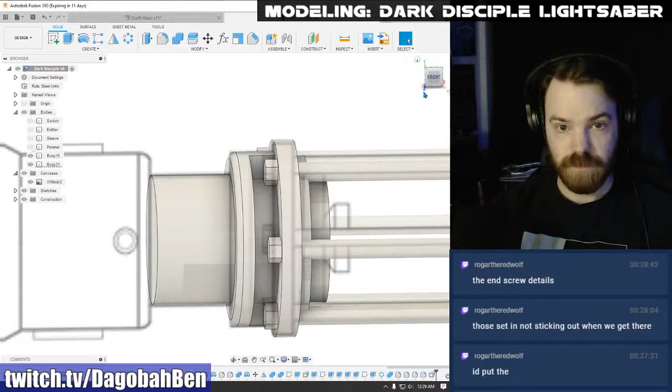That's all the appropriate size. We could press pull this just a tiny bit more, because we're still at like 30.5. That gets a little bit tight, I think.

Let's see, what is the interior diameter of this guy? 34. Okay, so it technically fits. It fits. So, no worries there. Oh yeah, that totally fits in there.

I could go a little bit more even, just to give these some clearance there. Press pull that, another 0.25. Did it do it? What's going on here? There we go.

The end screw details, I'm still not sure what you mean by them being set in instead of sticking out. I'm not 100% sure. I guess that inner detail I was working on.

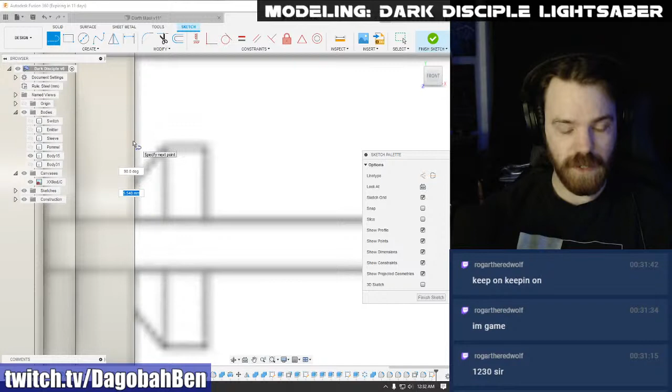So we've got from here to here, so it's right about, let's see if I can attach to something. That's around 5.5. Okay, so that means that this should be around 11, right? Yeah. And then the one that we're going to, 7 seems about right.

So grab both of these, offset about 3 millimeters, and then start. Oh, too far. All right, offset 2 millimeters, good enough. So we do that, and then I should be able to create a loft from here to there. Bam.

Cool. I'm not sure what the inside of this looks like until we can get a crystal in it. It'll probably have a shape in it that fits the crystal really well.

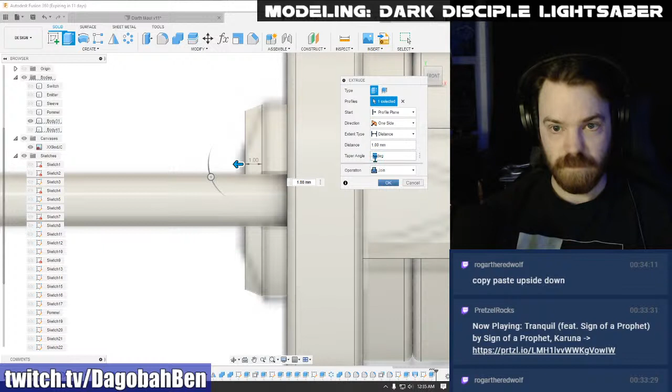All right, so grab these, like that. And then I can just, you know what? Instead of using that other sketch, I'm just going to do this and just taper it. Wow, this is, there we go, there we go.

Awesome. All right, I'm gonna go ahead and combine these two together for now. I think for printing, what I'd probably do is make larger holes in this section and then make these a little bit longer to make it fit that way. Instead of going through all that detail there, I think I'd just make it fit through this. It just seems simpler to me. So we'll go ahead and split so I don't forget that I need to do that. And then I just need to recombine that to that.

There we go, save. All right, so now we just need a crystal that looks kind of like the one in the concept art, I guess.

I forgot about these stupid little screw head things. All right, let's make one real quick.

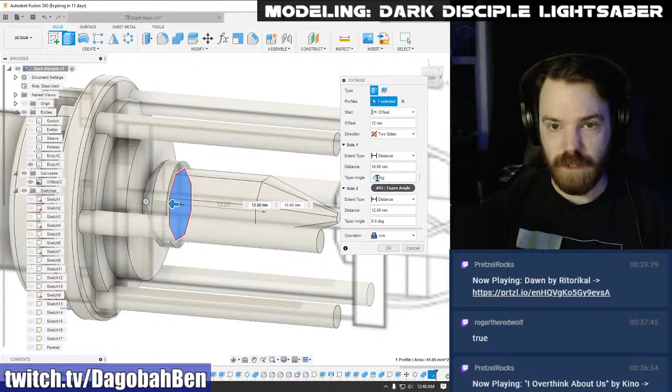Oh, that's right, okay so I don't want to do that. I don't want to taper yet. So what I want to do is make it short from where I want the taper to start, and then extrude off of that to taper from.

Because if I do 45, then that gets like that. Same thing here. I want it to join, but not to that. There we go. It's turning out a little bit long. Let's go back to our first extrude and just pull this back. It's a little better.

Yeah, because we just want those points to go into those sides there. All right, so now I should be able to grab chamfer. We'll grab a few edges there, we'll grab an edge or two on this side. I'm just gonna kind of randomly chamfer it in different places just to give it extra facets here and there, make it imperfect.

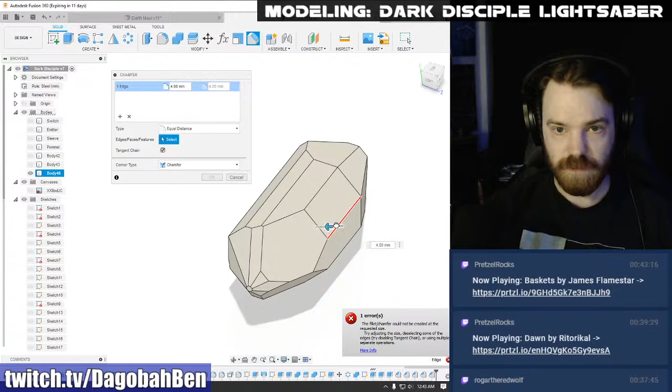No, that's not what I wanted. Let's grab, not you, let's grab you. And then grab these two. Oops, not that, that. Because I kind of want it to... What happens if we grab this edge, go that way with it? No, that makes it even flatter. This side is kind of

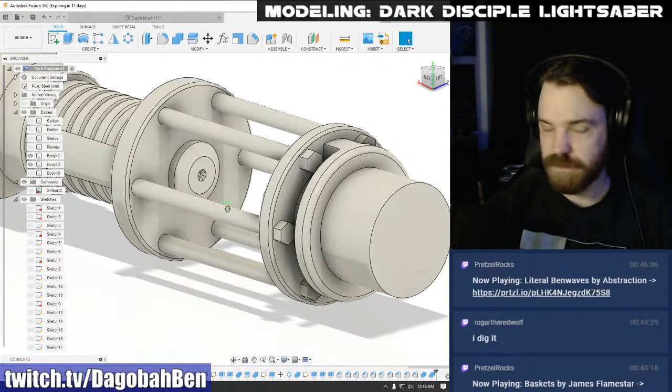indentations that only fit the crystal one way, which I can kind of help with if I fill this out, you know, then maybe it'll be...

Come on, come back. Don't be mad. Don't be mad, we're almost done. No, come on, we're so close. Don't do this to me now.

I just did the crystal and I didn't save. Ah. Crap. I don't think it auto-saved before I finished that crystal. Damn it. We were so close, we were so close. We did so much, we came so far. And ultimately, Fusion was just like, nah. You get nothing.

Oh, it says it has a recovery file. There's our crystal! Okay, so it just didn't copy our cut, that's what it didn't copy. So save that. Bam. All right, cool, we are safe.

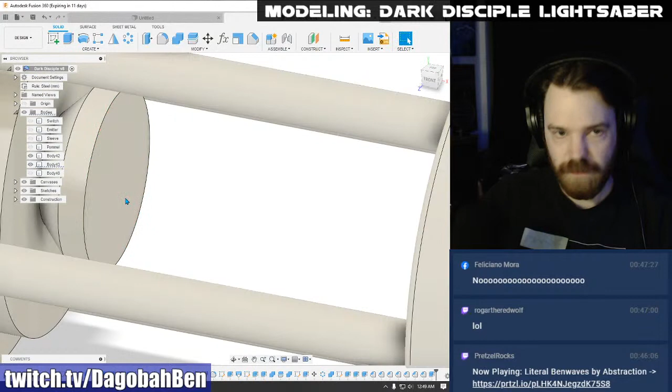I'm gonna go to this one. We're gonna go back minus 0.337. All right, then inspection from here to here should show 20. What? I went the wrong way.

I need to extrude 0.337 more to make this and this be happy. Okay, alternative option is I take this whole thing and translate it this way, 337.

Our struggle as artists isn't about appeasing the crowd.

Okay, so then that to that is 21. Okay, so now that that's 21, the crystal is 23. Then what we need... so what I'm gonna do is I'm gonna go ahead and do what I did before.

I'm gonna use this as a cutting tool. But I'm just going to use that to kind of get an idea of how much room I need to cut away from these things to make it all fit. Because I don't want the crystal to have to fit a very specific way, so we're gonna round it out and stuff.

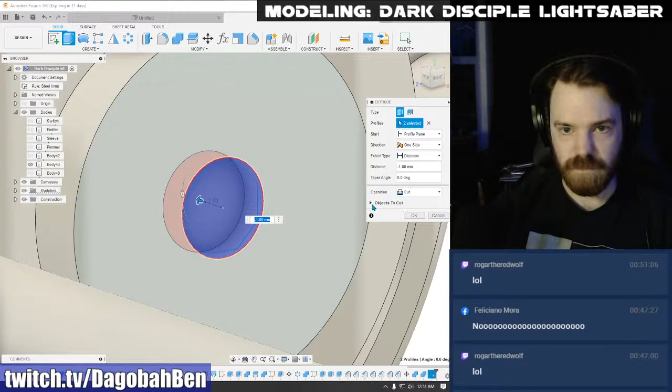Alright, so I feel like if I make that, right? And then just pull that back. Hey, what the heck, man? There we go.

And then if I fillet this, then it should be really easy to pop that in there. I might make that opening just a little bit smaller. Maybe. Well, I know that fits like that, so maybe I should leave that alone. Okay.

All right, so then same thing over here. Make a circle that's just barely bigger. Turns out to be almost 3 millimeters on the dot.

There we go. All right, I know I have to fix this stuff to make it all fit together, but I'm not going to worry about that right now. I want to turn things on and color this and render it real quick.

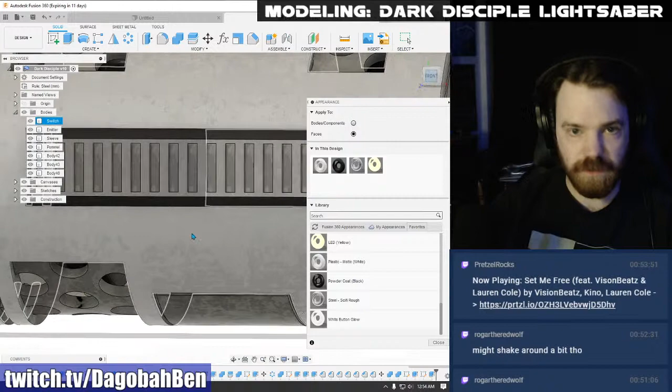Okay, if I get rid of the switch, then this interior stuff we'll make matte black. Yellow LED for that. And then this was black, I think. And then there was some white faces, or at least they looked white. Not ABS white.

There we go. Ah, dang it, I selected the wrong thing. Try again. When you click just a little bit off, you accidentally select the whole thing. Damn it, I did it again.

Alright, slow down, you're not in a hurry. Just slow down. I mean, yeah, it might shake around a bit, but I guess the expectation is if you don't want it to jostle, then you can just glue it in place, you know? Why didn't that look like it did anything? Oh, what the hell, man. Come on, don't do that to me.

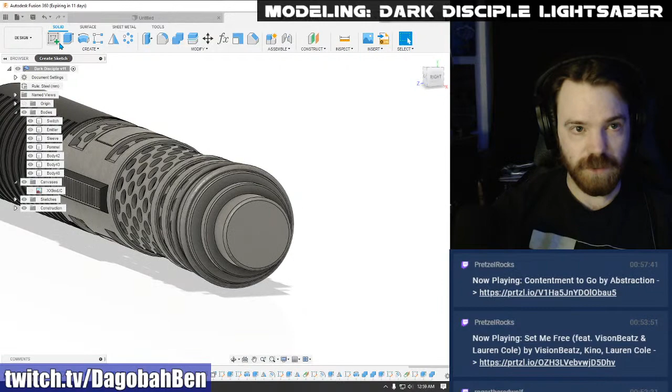There we go. Okay, we've got one more thing we have to do in design space. We have to put a blade in this. So we need sketch on the front. And big enough for a 7/8 blade comes out to, let's see, 22 point something. 22.22, so we need at least a 23 millimeter. Or well, I guess 22.75 would be acceptable. Okay, then just back that up a little ways.

Kind of a thin-walled emitter there, but alright. And then this is 22.25. There we go. And then appearance, yellow, render.

We're gonna go this way with this one apparently. Bit of a turnaround from the ways that we've rendered all these before. Quick in-canvas render to see how it's going to look. Oh yeah, that crystal glowing from the inside, that's going to look really freaking cool. For sure. Alright, we'll stop that, hit render on this.